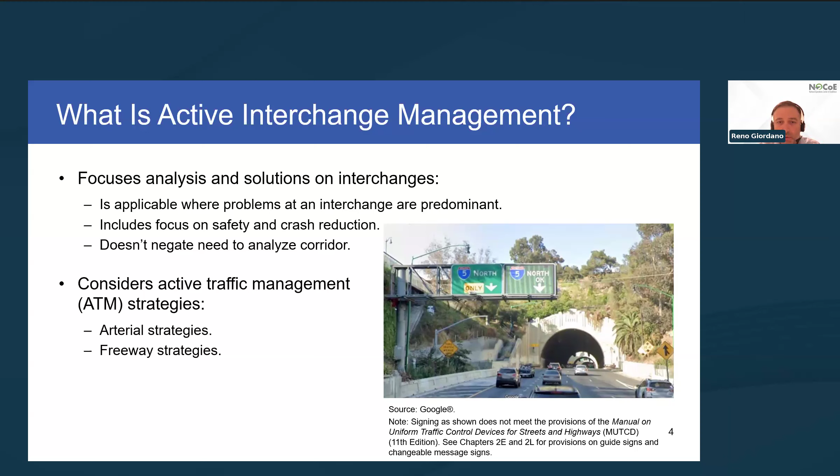And just so you know, the photo on the slide is in Los Angeles. It's illustrating dynamic junction control, which is one of the active traffic management strategies under the AIM umbrella. We'll talk a little bit more about that when we get into the examples.

So why is active interchange management important, or why did we focus on applying active traffic management strategies to interchanges? Historically, safety improvements and congestion reduction at interchanges relied heavily on traditional infrastructure improvements, such as adding lanes, widening or extending ramps, or modifying ramp terminal intersections. But many interchanges, especially those designed and constructed several decades ago, have geometric configurations that make upgrading infrastructure to current standards time consuming and certainly costly.

But AIM offers an operationally focused alternative that's more dynamic, more flexible, and actually more cost effective.

In addition, AIM offers an alternative to more extensive corridor-wide operational solutions by focusing on the primary bottlenecks in most freeway corridors, particularly metropolitan regions. Those are the interchanges themselves.

AIM is important because interchanges are a significant source of safety and congestion problems. These occur due to bottlenecks, queue formation, and vehicles diverging or merging, which result in concentrated lane changing over relatively short distances. Research has shown that free flow capacities at these merge and diverge areas are less than elsewhere along the freeway corridor, so solving interchange problems may improve overall corridor operations.

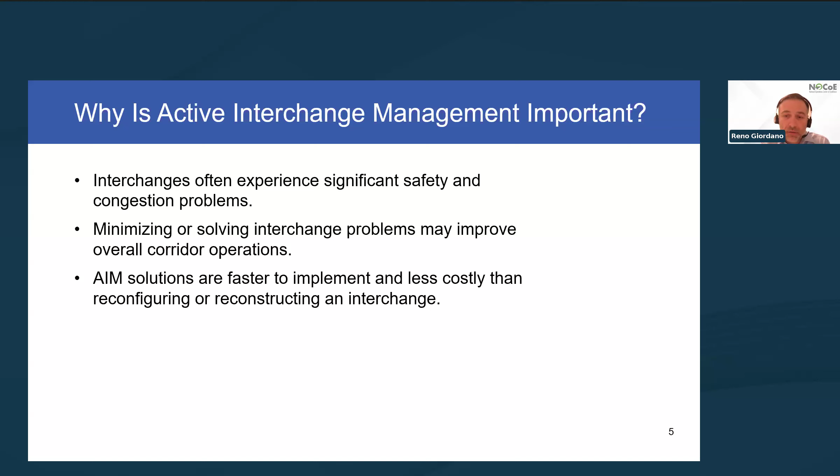As noted, the suite of AIM strategies consists generally of a set of 7 or so active traffic management strategies that can be applied singly or in combination. Right now we'll quickly review each of those summarized here on the screen. The first,

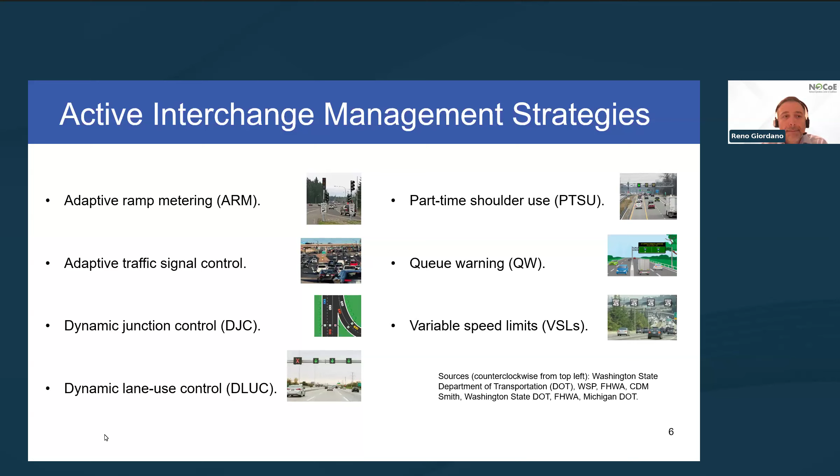adaptive ramp metering. Ramp metering uses traffic signals placed on freeway entrance ramps to regulate how often vehicles can merge onto the freeway. This strategy controls the volume of entering traffic and disperses platoons of vehicles that complicate merging movements. Algorithms dynamically adjust the vehicle rate entry in real time based on congestion levels, and the method is effective for both regular and unexpected traffic congestion.

Of course, adaptive ramp metering is typically more effective when applied at multiple interchanges along the corridor, but when applied in this manner as part of a corridor management strategy, it can complement a more localized AIM approach.

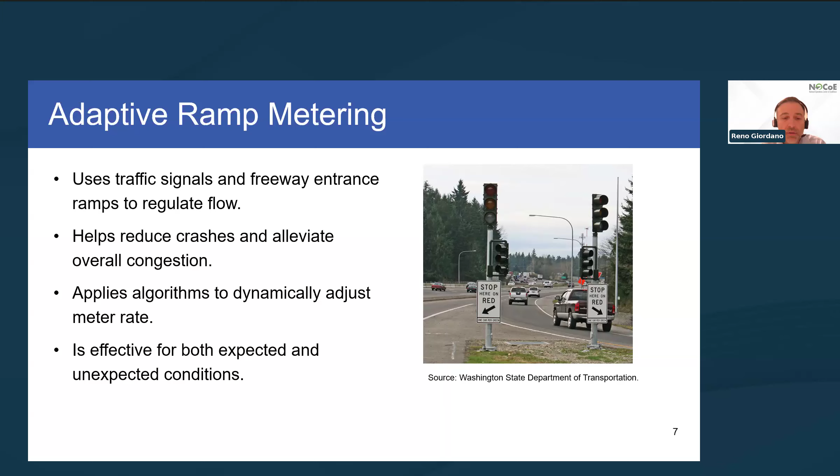Second, adaptive traffic signal control. This involves technologies that collect real-time traffic data to dynamically adjust traffic signal timings and optimize the flow of traffic in a coordinated signal system.

As an AIM strategy, adaptive traffic signal control can be applied at ramp terminals to improve the flow of traffic at those specific locations, managing the potential for backup up the ramp and potentially onto the main line. Adaptive traffic signal control is more typically coordinated with multiple signals along the corridor to be most effective.

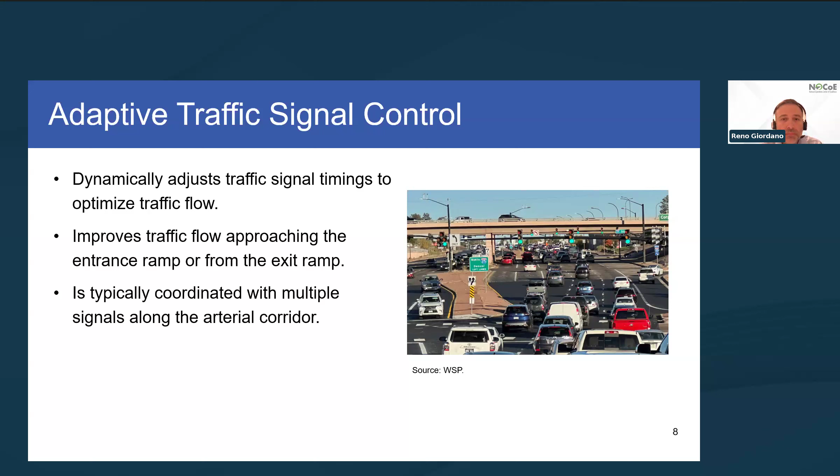Third, dynamic junction control. Dynamic junction control does focus specifically on interchanges, although it doesn't have widespread use, which may be something to consider, maybe overlooked. But dynamic junction control dynamically assigns lane use on main line and ramp lanes at interchange areas where demand fluctuates throughout the day, and often there's an imbalance in that demand between the main line and the ramp.

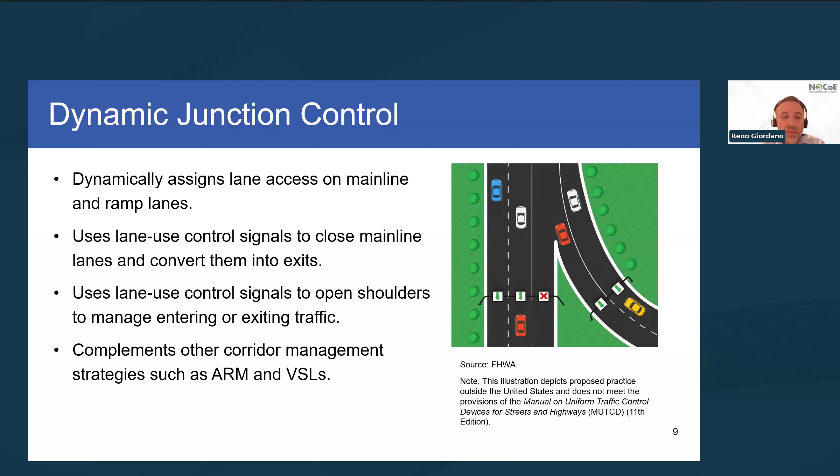We have dynamic lane use control, which involves dynamically closing or opening individual traffic lanes as needed, using overhead lane use control signals. Usually advance warning to drivers is typically given through changeable message signs to encourage safe merging into adjacent lanes.

This strategy is often also used alongside things like variable speed limits and complements other strategies like part-time shoulder use and dynamic junction control.

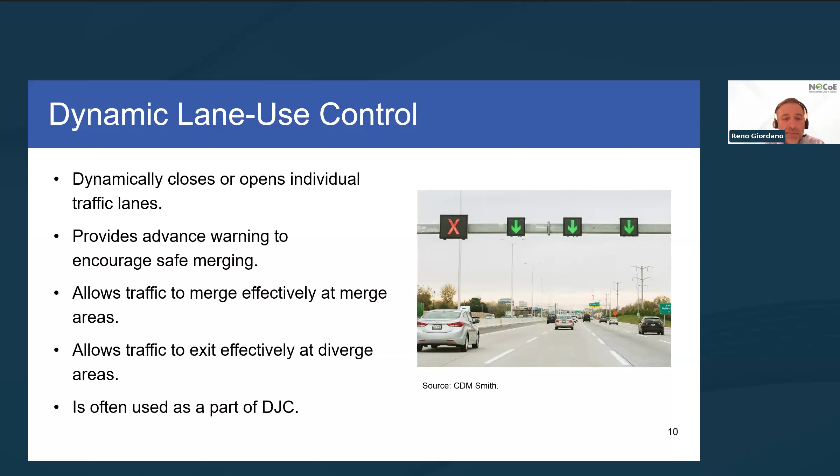Part-time shoulder use itself dynamically enables travel on the shoulder based on congestion levels during peak periods and in response to incidents or other conditions during non-peak periods. This strategy is often implemented in combination with variable speed limits and dynamic lane use control. For interchanges, part-time shoulder use can add lane capacity along ramps or main lines to help merging or exiting movements.

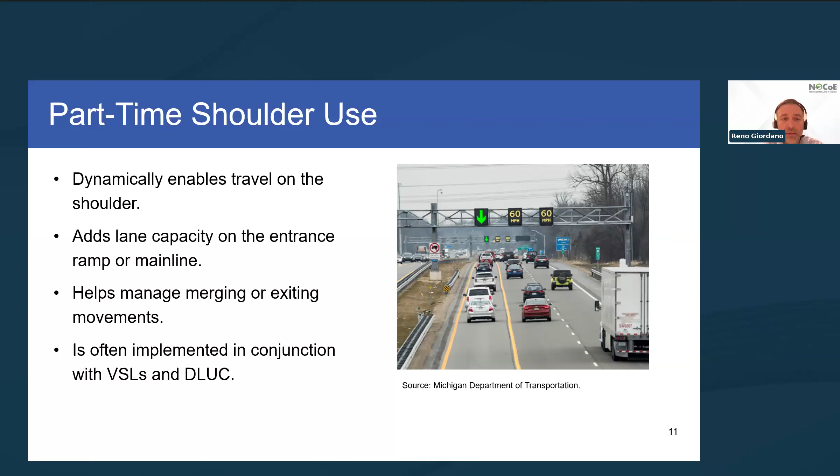Queue warning involves the real-time display of warning messages, usually on changeable message signs, to alert drivers of upcoming congestion and slowdowns. In our case, those would be originating at interchange, merge, or diverge areas. This strategy helps reduce rear-end crashes and enhances safety, and again, can be implemented with others, such as variable speed limits and dynamic lane use control.

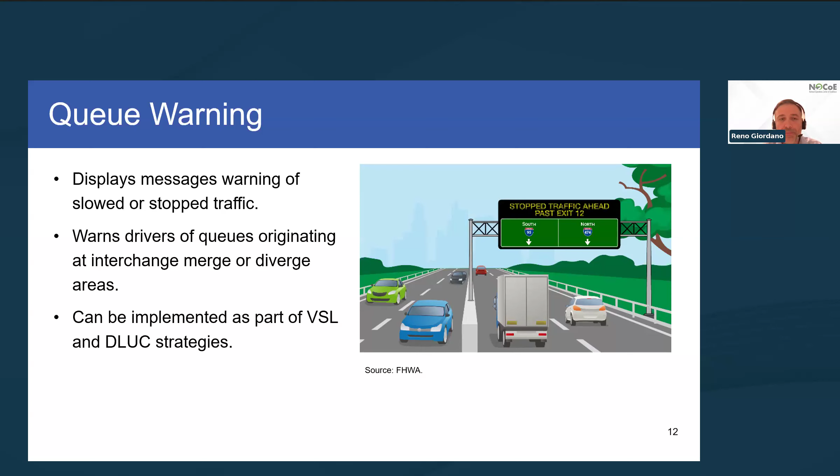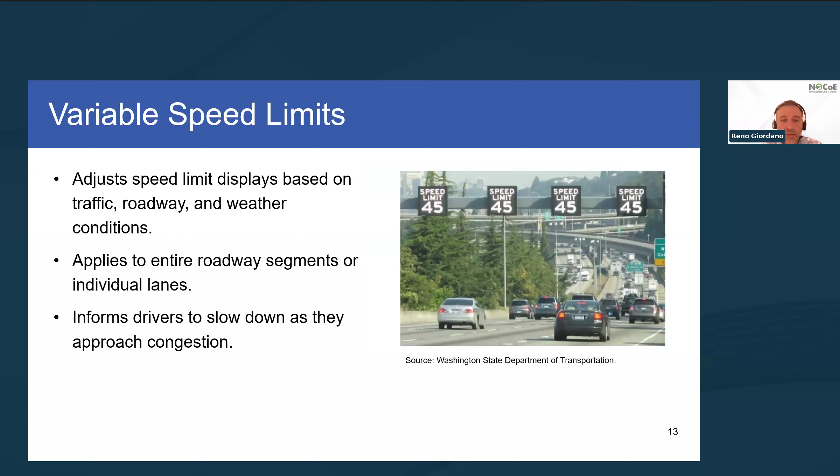And then variable speed limits adjusts speed limit displays in real time based on traffic, roadway, and weather conditions. These speeds can apply to entire roadway segments or individual lanes, and the process helps reduce speed variations between the slowest and fastest vehicles, enhancing safety.

Overall, we refer to those 7 active traffic management strategies in the context of AIM and addressing interchange problems as AIM strategies. So we can summarize them all here in terms of their objectives in the context of addressing these interchange issues.

For adaptive ramp metering, that would be improving traffic flow to allow a better merge. With adaptive traffic signal control, that's improving traffic flow approaching an entrance ramp or moving through the exit ramp. Dynamic junction control, the objective there would be to optimize lane use to improve merge conditions or to optimize lane use to minimize queue spillback.

Dynamic lane use control is to optimize lane use to allow traffic to merge more effectively or to allow mainline traffic to exit more effectively. With the application of part-time shoulder use, that's to add lane capacity on the entrance ramp or main line to help manage merges, to allow traffic to have longer merge distances, or to add additional lane capacity on the main line to help manage exiting movements.

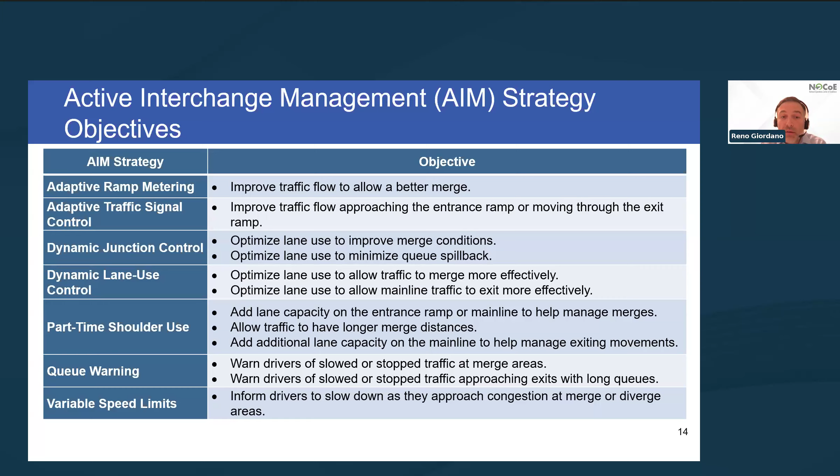With queue warning, it's to warn drivers of slowed or stopped traffic at merge areas or slowed or stopped traffic approaching exits with long queues. And last, with variable speed limits, it's to inform drivers to slow down as they approach congestion at merge or diverge areas. So now a few examples of these in practice.

We have a dynamic junction control example, the queue warning example from Florida that we'll certainly hear more about, and the combination of adaptive ramp metering and part-time shoulder use in Melbourne, Australia. So in LA...

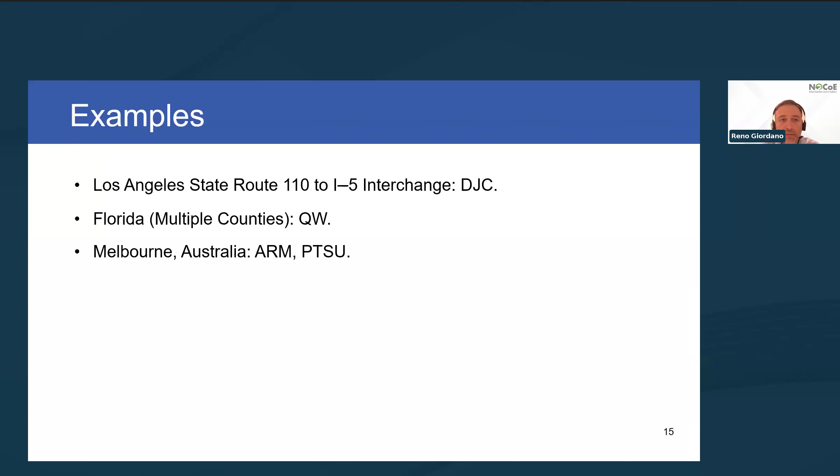The application of dynamic junction control can be found along State Route 110 northbound as you approach a left exit to I-5 northbound. Before the application of dynamic junction control there was significant backup during peak periods from that single lane left exit ramp, which backed up onto 110 through a series of tunnels as well, as you can see in the images on the screen.

So Caltrans decided to open the right shoulder of the exit ramp during peak periods to increase exit capacity, and then permitted the second left lane on 110 approaching the exit to be used as an exit lane to the ramp shoulder. That can be seen in the upper image there, where the I-5 North only sign is displayed upstream on a changeable message sign, indicating that both left lanes can be used to exit to I-5.

During the off-peak, with the ramp shoulder closed, the second left lane reverts to a through lane only for SR 110. As you can see in the lower image, it just says 110 north only. And the results from implementing dynamic junction control here were pretty significant. Average ramp delay declined from more than 20 minutes to less than 5, and crashes were reduced by 30% as well.

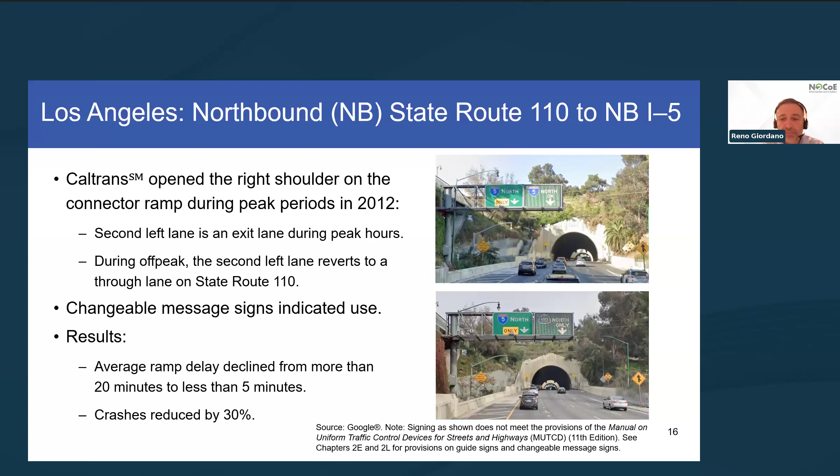Second example we have is the Florida queue warning. I won't spend a lot of time on this one since Eric Gordin will speak about it.

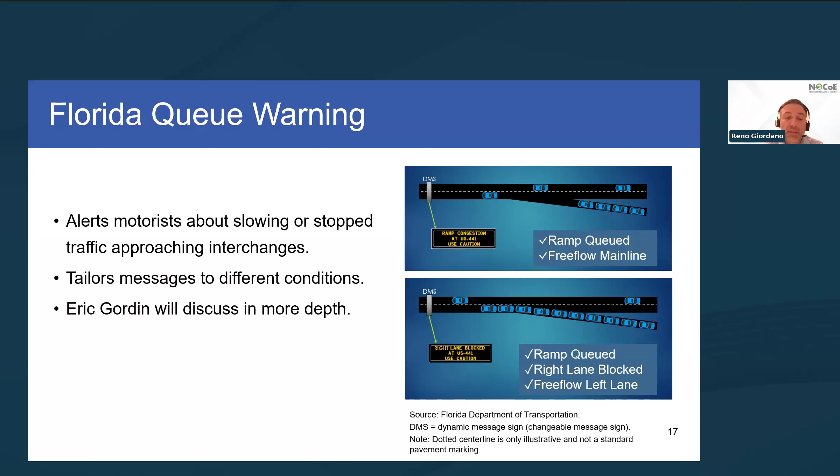In this example, Florida's Turnpike Enterprise is installing queue warning systems along the Turnpike system in several counties to alert motorists to slowing or stop traffic backing up from congested interchanges. Radar devices detect traffic slowdowns or queues near ramps and then automatically trigger messages on changeable message signs to warn the drivers of upcoming traffic conditions. And those messages can be tailored based on congested conditions.

Last example from Melbourne, Australia. This is part-time shoulder use in combination with adaptive ramp metering. In Melbourne, certain entrance ramps have an added lane for metered priority vehicles. Those vehicles are heavy trucks and transit vehicles.

That use of the shoulder on the ramp provides a queue jump while all traffic is in fact metered entering the roadway. So the priority queue jump lane is closed when speeds are higher or volumes are lower, and opened during metering when merge speeds are lower.

This approach is also used where no priority lane exists. The shoulder is used simply for additional queue storage during metering operations. So the photos there show this.

This is the on-ramp from Sunshine Avenue to the M80 Metropolitan Ring Road. The top photo shows where the priority lane starts, and the overhead lane use control signals indicate if the priority lane is open or not. The bottom image shows further downstream at the merge point, where the priority lane merges with the standard entrance ramp lanes, and ramp metering is applied.

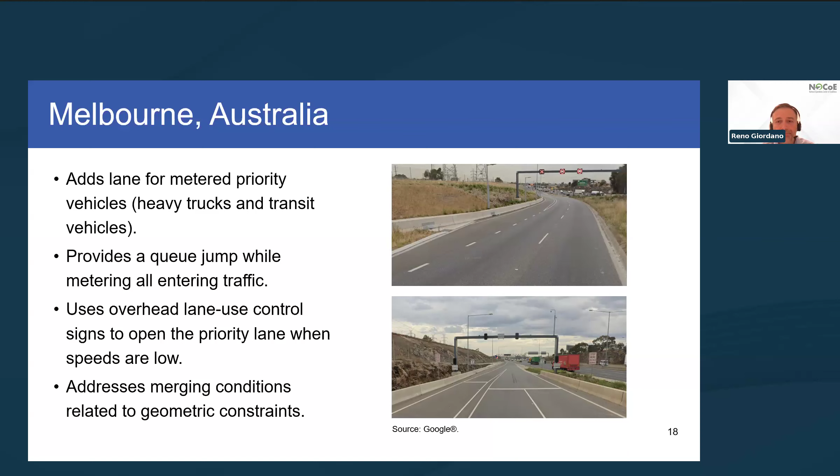Earlier I noted that one reason for focusing on active interchange management was to address often overlooked problems from non-recurring congestion that may occur less frequently but still justify an operational strategy.

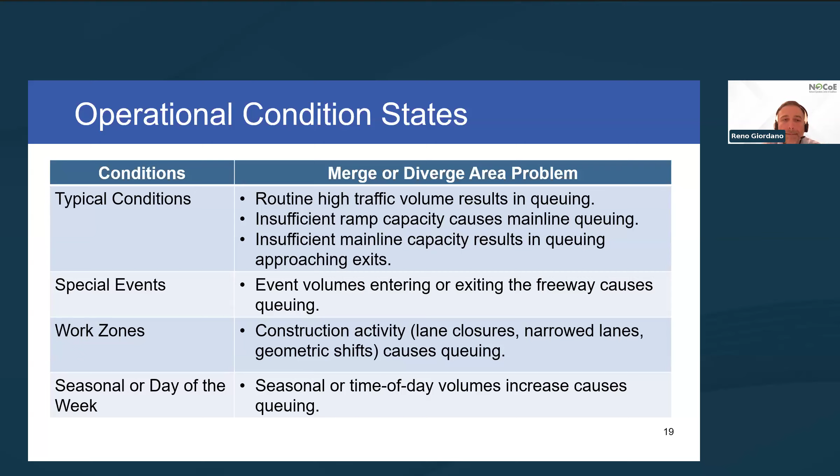To summarize the benefits of AIM, we've been talking about improving safety, and we've seen evidence of reduced crashes, reduced crash severity, and reduction in near crashes. Operationally, we can see a reduction in congestion, evidenced by decreased travel times or increased travel speeds, less delay, more consistent speeds, and improved reliability.

We can also identify improved cost effectiveness compared to traditional infrastructure improvements, shown through improved benefit cost ratios, and of course with an operational solution, increased operational flexibility - the ability to adjust your strategy relative to less flexibility from a fixed infrastructure solution.

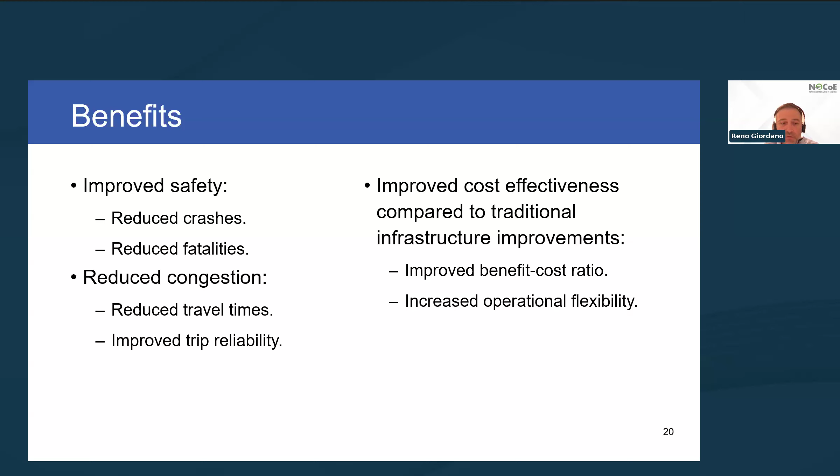Some of those benefits quantified here mention the dynamic junction control example in LA, with substantial delay reduction and crash reductions.

While not necessarily associated with single interchanges, we've got a few examples from active traffic management strategies as well - part-time shoulder use along US 23 north of Ann Arbor in Michigan, called the flex route, which also includes dynamic lane use control and variable speed limits. That's shown a benefit cost ratio of 3, along with notable safety benefits, crash reduction of 17% or even 50% during peak periods. Drivers report high satisfaction with the operation. The flex route on US 23 is currently being expanded further north to I-96 and applied to at least one other corridor in the state.

For variable speed limits, a good example is the I-80 corridor east-west across Wyoming, which has shown significant safety benefits - crash reduction of more than a third, and a strong benefit cost ratio of about 9. And queue warning in the Twin Cities region of Minneapolis along I-94 has shown safety benefits of 56% crash reduction and 69% reduction in near crashes.

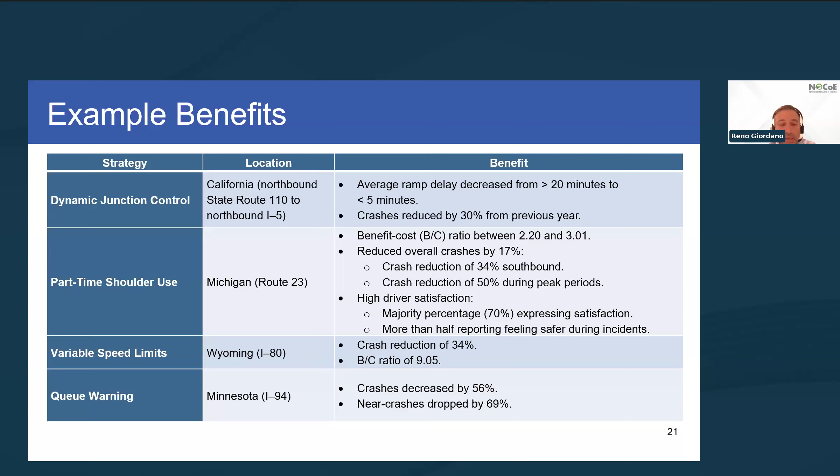Now I'm going to turn it over to Les Jacobson. We'll talk about a methodology to screen problematic interchanges for potential AIM strategies, and then a hypothetical merge example to illustrate it. Les will wrap up with some comments on challenges for applying AIM, and then quickly summarize a couple of products from this project. So go ahead, Les.

Thanks, Reno. So we have a flow chart that I'll get into, but it's a pretty long one, and we can't really see it very well on a single screen. So I'm going to start with a table to give you an idea of what the flowchart does, and then I'll walk through the flowchart as well, because I think it's a little bit easier to follow with a flowchart - at least it is for me.

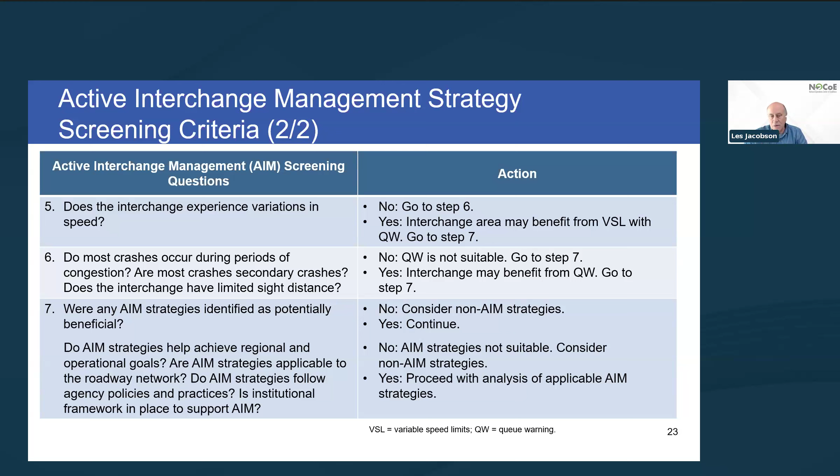Then, finally, look to see if any of these are going to be potentially beneficial. If so, then you should continue, meaning proceed with a more in-depth analysis of the applicable strategies to know which ones to use. So this is kind of a screening to see which ones might be beneficial, and once you have those screened down, go ahead and do a more detailed analysis.

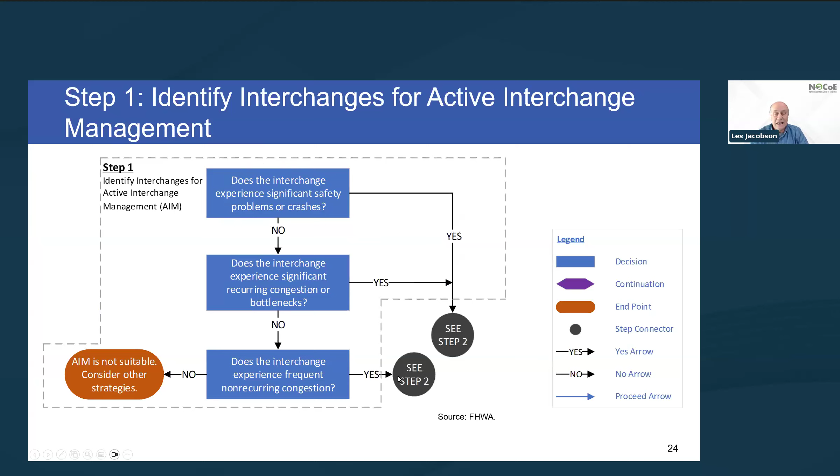So just to show this approach in a flowchart, we start by looking at whether the interchange experiences safety problems or crashes, and if there's recurring congestion. If we see yes to any of that, then we go to the next step, which again is to consider adaptive ramp metering.

So if it's already metered, then we go to step 3. If it's not, that's something you may want to consider adding to your active interchange management strategies.

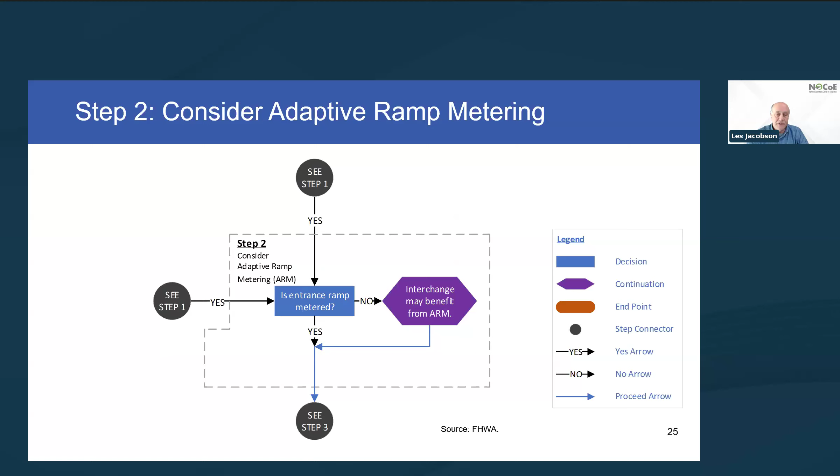Next, as we mentioned, we look for dynamic junction control. We suggest that if there are large variations in mainline and ramp volumes occurring, you may want to consider dynamic junction control.

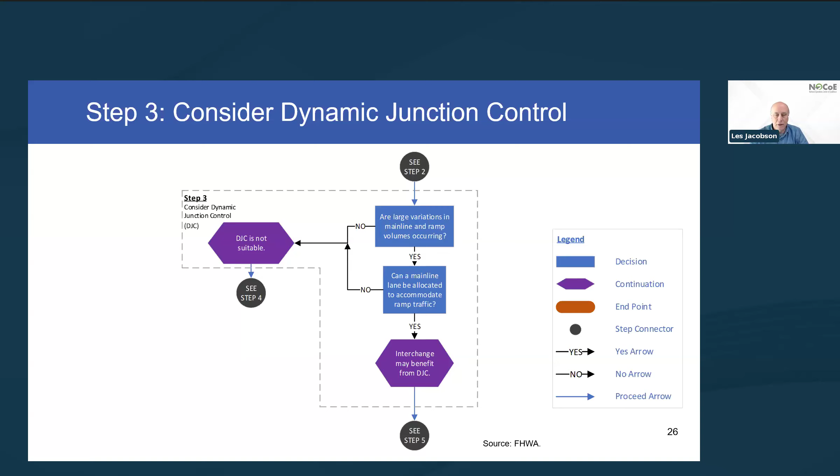What that would do is virtually change the right lane of the mainline with the merge lane from the ramp, encouraging people to move out of the right lane so there's more room for traffic coming onto the ramp. The hypothetical example will demonstrate that a little better if you're not certain what that's all about.

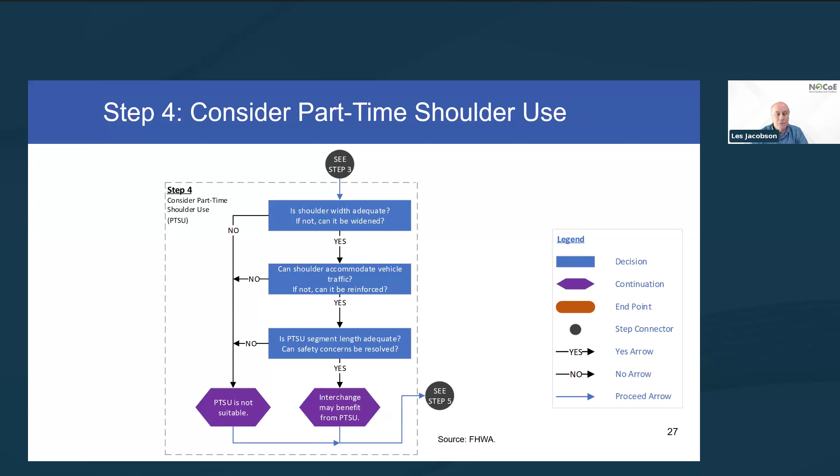After that, look at whether part-time shoulder use is needed. This could be on the ramp or on the mainline, to provide a little more merge length and room to merge into. So again we want to look at the shoulders, and whether you can get a long enough segment to make part-time shoulder use effective.

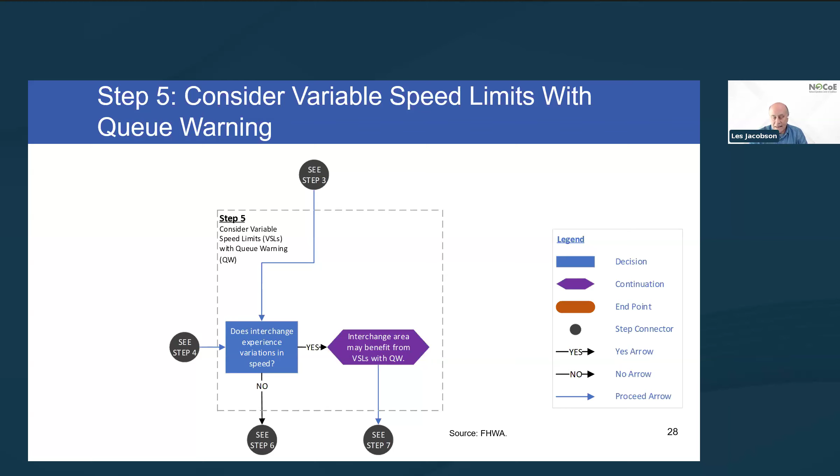Essentially, we move into variable speed limits, checking to see if that applies, just as in any other place, looking at whether there are large variations in speed. You might get people who encounter variations in speed unexpectedly, so variable speed limits can slow them down before they reach that congested location.

And queue warning could go hand in hand with variable speed limits, or could be used without variable speed limits, to warn people of those speed discontinuities before they get there.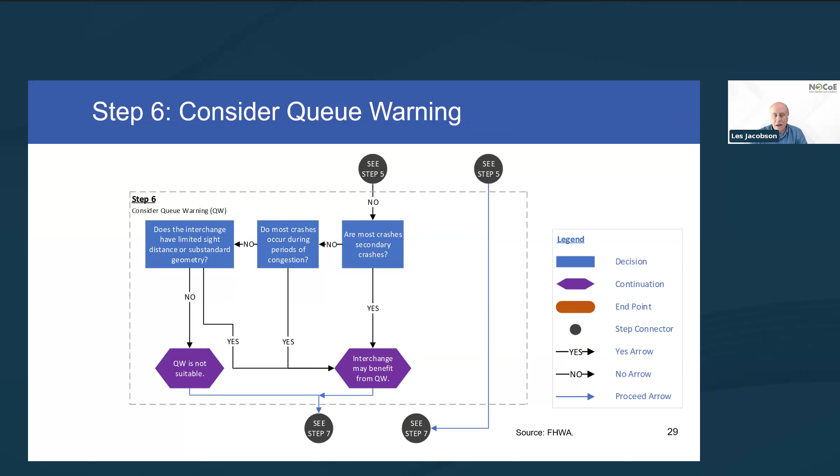Again, look through all of these, and if some strategies have been identified, you really do want to go through and check some other things before you get to the analysis. You want to see if you've got the goals to improve the network, and if your strategies support those goals. Also, if the agencies that are going to be operating it are prepared to operate a real-time active management system. And if those answers are yes, then you go ahead and do the more in-depth analysis.

Moving on with the hypothetical example, here we've got an area, a merge area, and this is not meant to be to scale, so don't be concerned about how sharp this merge seems to be. What happens is there's a high demand entrance ramp from an airport that merges with a multi-lane highway. The peak ramp demand does not coincide with the peak mainline demand, so you get this surge of traffic from the airport not at the same time that the recurring congestion on the main line occurs.

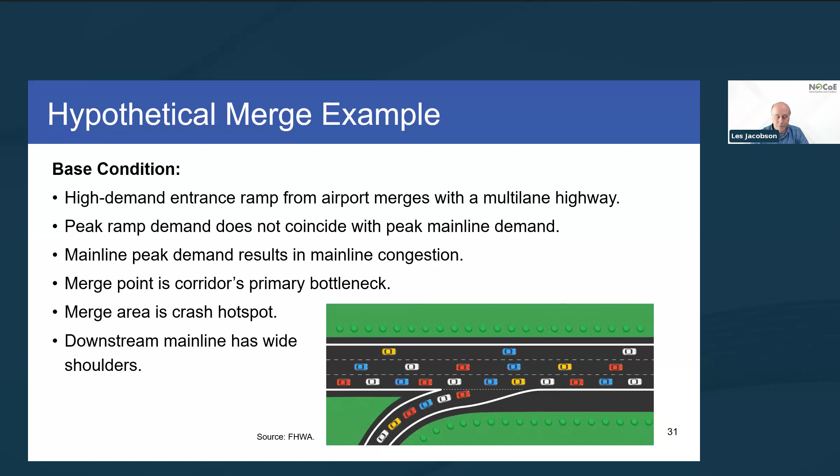So to look at the screening process, in step one, we see that there's some crashes and congestion, and it's a candidate for active interchange management strategies.

It may be that ramp metering would be effective. It doesn't have ramp metering today, and there's no other metering in the corridor. So ramp metering may or may not be appropriate there. Usually you want to have several ramps in a row in order to have ramp metering be effective.

There are large variations in traffic volumes, and there are times that the main line during the peak volumes can't give up a lane to allow that merge traffic to come in.

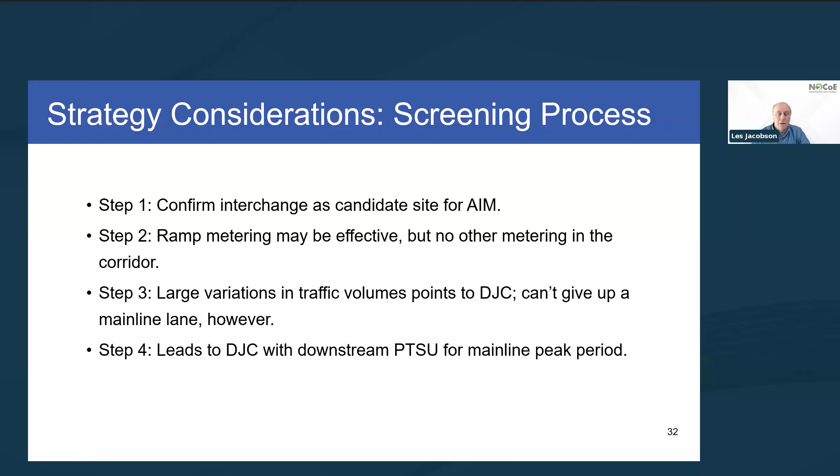So it leads us to looking at dynamic junction control with downstream part-time shoulder use for the mainline peak period. Off-peak, we could do junction control, and then during the peak, we would use mainline part-time shoulder use. So that would look something like this.

This is the peak option where the shoulder lane is in place. The shoulder lane would be in operation and have a changeable message sign that would show that it was open. This changeable message sign here, I want to point out, but it's blank, so that this traffic coming on from the ramp would have a hard time merging into the main line. So it's much more effective to be able to give them a lane that might go as far as the next interchange for them to merge into the main line.

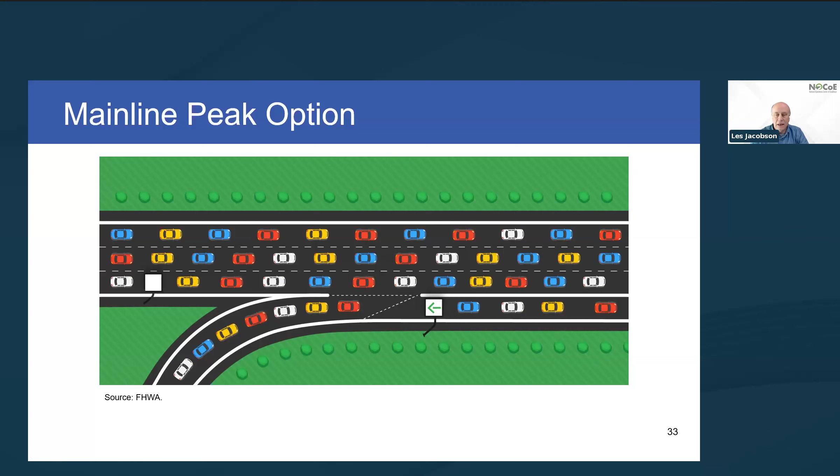So when the airport ramp has its peak, there's much less traffic in the main line, and that's when dynamic junction control might be more effective. You don't lose the refuge area of the shoulder, and the CMS back here would alert drivers that there's a heavy merge from the right ahead and encourage them to merge out of that lane to give more room for merging traffic from the ramp.

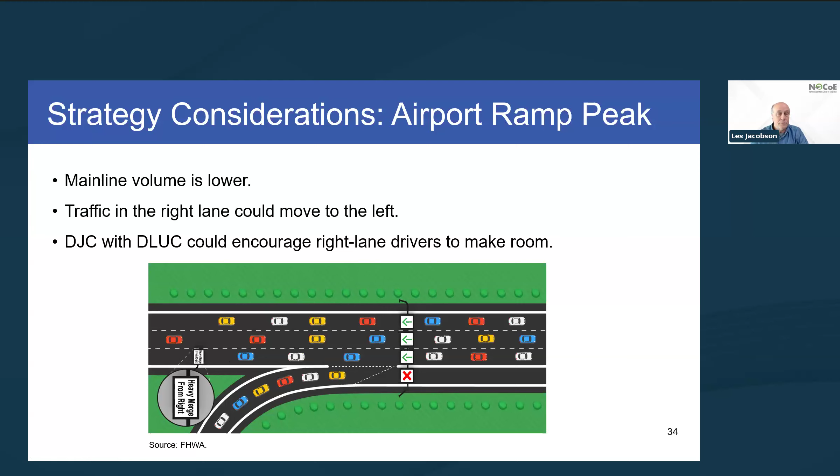One of the things you'd want to consider is that there's a lot of fluctuations in ramp demand seasonally, caused by flight delays. So having some things that are very flexible in terms of operation would be important. Also, because there could be this unexpected queuing, including variable speed limits and queue warning is probably worth considering.

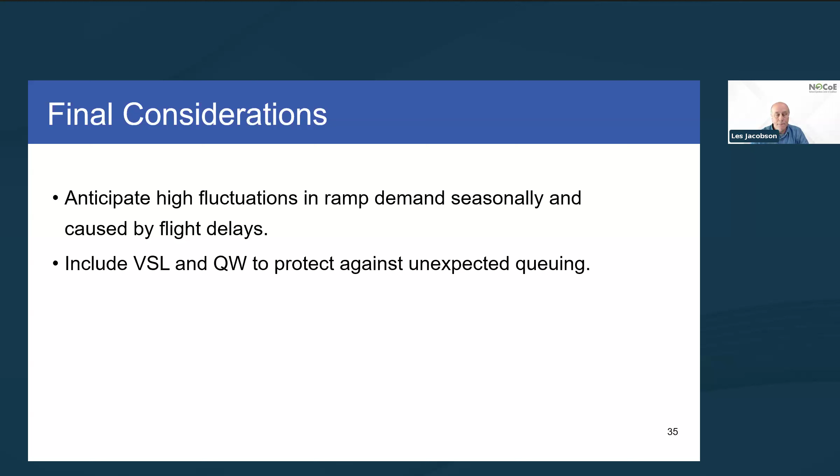So some of the challenges with any of these active interchange management strategies, some are institutional and educational. Are you and your partner agencies ready for something like this? Is the public going to understand it? What kind of education needs to be provided for both agency staff, but also the driving public?

Also, do you have the funding to be able to do whatever your strategies are? Do you have the staffing that's necessary? Do you have a history of traffic management? Do you have the facilities to manage this effectively?

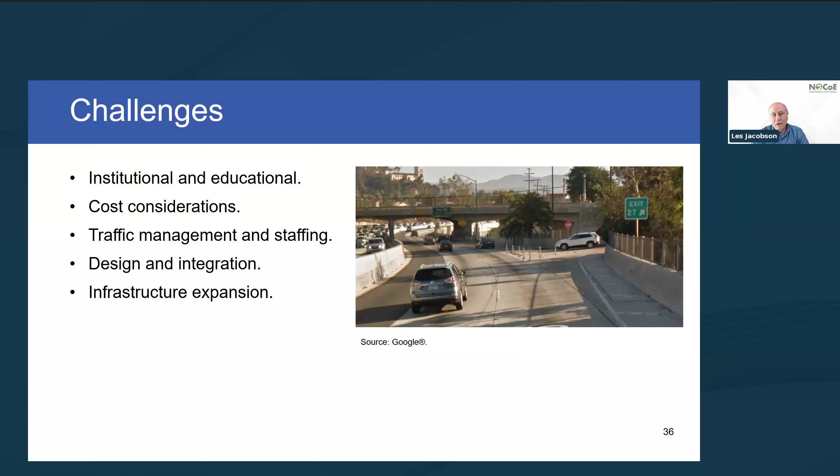You also want to think about design and integrating this into your overall transportation management process and scheme. And finally, is infrastructure expansion going to be occurring in the future? Are there some other things in the corridor that might have to occur? Just take that into account in your overall strategies and plans.

So this project overall, we've got a few things coming out. There's a primer that will explain all of this in a lot more depth. There'll also be a shorter informational brief. And then we're planning on anywhere from 3 to 6 locations to have workshops that would actually apply this process to particular interchanges for an agency.

That'll be coming up. So with that, we'll hold questions to the end, and we can move on to Eric to talk about their queue warning system with the Florida Turnpike Enterprise.

Yeah, thank you, Les. Sorry, I had to find the unmute button. We really appreciate this opportunity, Kelly and I, to join the NOCoE team. Thank you so much for the invitation. We're going to talk about the queue warning system, of course.

Today I'll be co-presenting with Kelly Kenny. Kelly's our TMC program manager, leading our queue warning software effort and all the operations as it moves forward. So she's a key and vital person leading the charge on queue warning. What I wanted to do was start off with a brief overview of Florida's Turnpike, super brief. We consider ourselves to be a vital part of the infrastructure here in Florida.

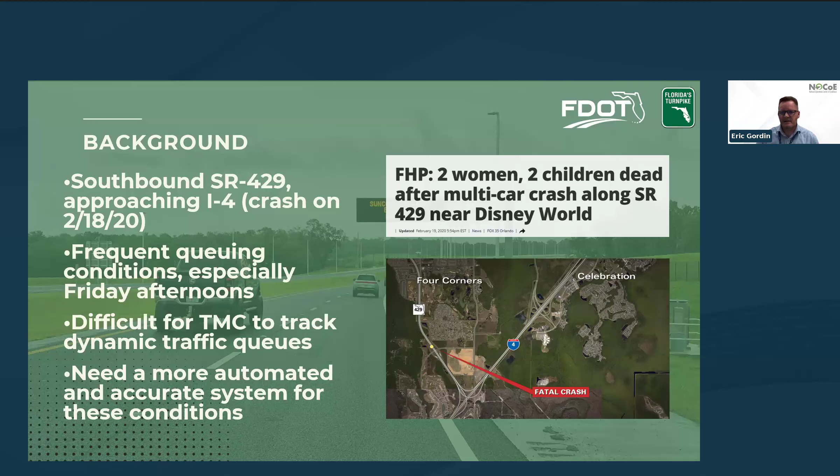I know there's a lot of information on these initial slides, so I'll go fairly quick through these. The main takeaway is, if you recall, the fatal crash happened in February 2020. In this case, what we did was we split up our system into a northern queue warning and a southern queue warning system. State Road 91 is another term for Florida's Turnpike, and that's the main road between Orlando, north of Orlando, and the Miami, South Florida area. Along with these, we included 528 and 429, both in Central Florida, and then 589, which is actually in the Tampa area.

During this initial screening, we worked with our consultant and said, where are we having the most challenges? What are the high priority locations on our system? For the northern system, the Central Florida and West Coast, we identified approximately 7 locations, including southbound 429 to I-4, the example from the fatal crash. Part of what we also included in the post-design services was the initial development of a queue warning software.

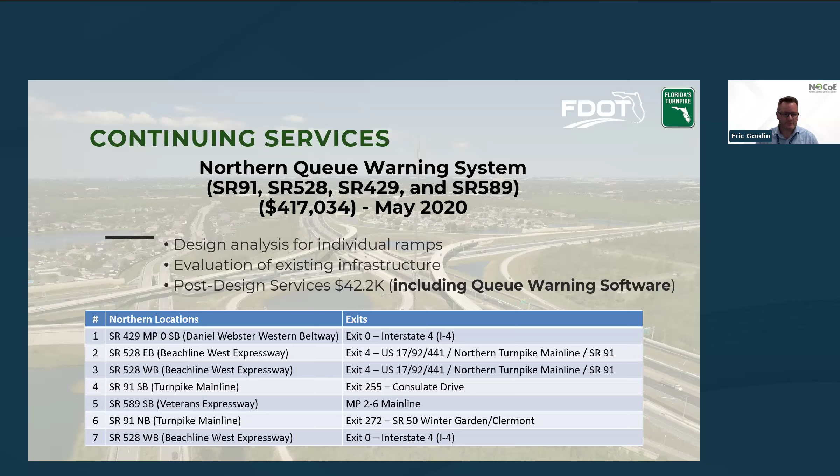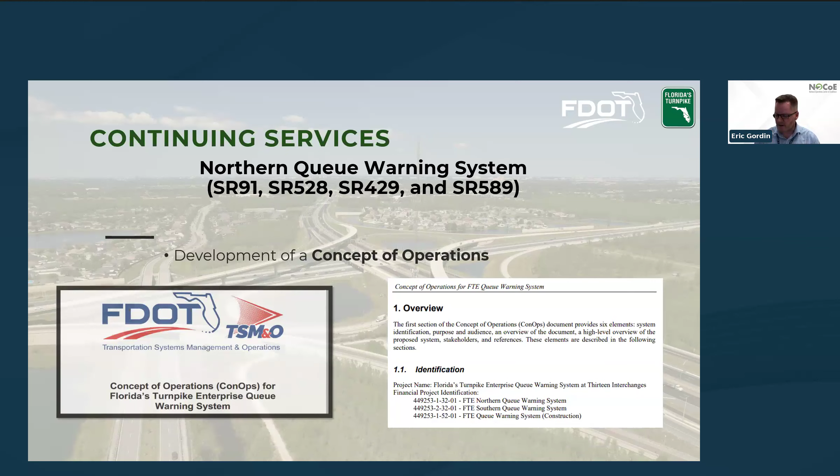One of the things I wanted to point out, since this was a very new approach and new system for us, we wanted to include a very good and detailed concept of operation. That was included as part of the initial queue warning systems starting in May 2020.

Here's a list on the southern queue warning systems. It also had some software components to it. These are some other locations located in our southern region off of the Sawgrass Expressway, the main line, and then the extension that takes customers and travelers all the way to US 1 if you're headed to the Keys.

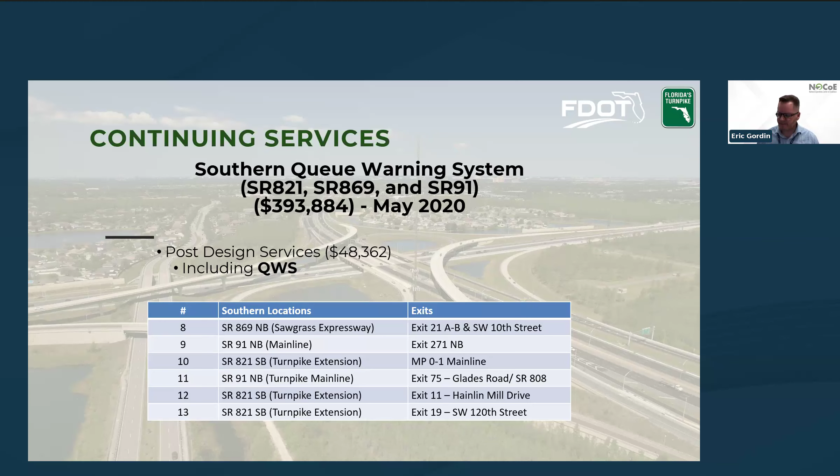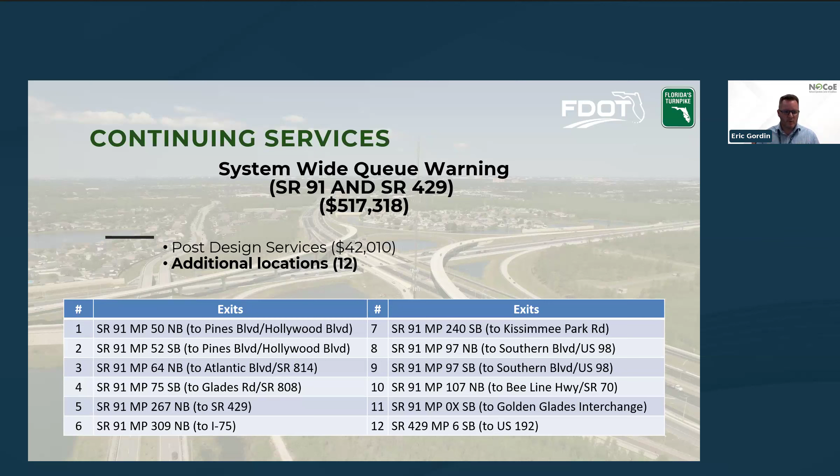After that point, once we did the initial northern and southern, we started looking at, on a system-wide basis, what are some other locations where we could apply this? During that process, we actually added 12 new locations to that list based on our knowledge of where we were experiencing the most queues approaching these particular exits. So initially we started off by looking at what interchanges were causing the most severe congestion for us, and what we could do about them in terms of queue warning.

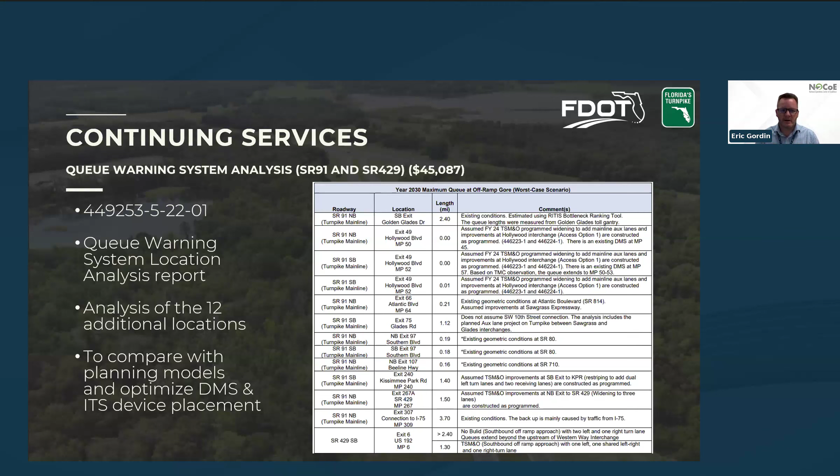On this slide, I wanted to point out that we talked with our team and felt the need to perform a very accurate analysis of where we were going to need to put, let's say, a new dynamic message sign, and where's the optimal or best location for that sign. Because every interchange experienced a different level of traffic queuing, what we did in this level of effort is conduct an analysis report, analyzing 12 different locations, and worked with our team to try and approximate where the maximum queue might be. That then enabled us to place the DMS, if it needed a new one, in the best and optimal location where we could.

Going back to some of the locations we identified in the northern and southern queue warning systems initially, and then we added the 12 new locations, we determined that not every location needed new infrastructure. It might have needed a new detector to help us, or it might have needed a new camera so we could have better visibility.

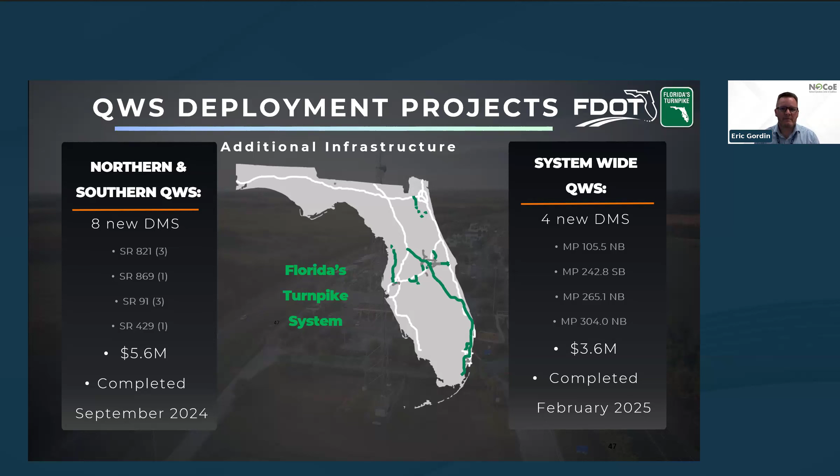So next, I wanted to transition it over to Kelly, and she's going to talk a little bit about the benefits and go into more detail about the queue warning system itself. Thank you. Thanks, Eric.

So as Eric mentioned, I'm going to start with the benefits, and we saw 4 main benefits when we first rolled this out. We immediately noticed, as we were able to message dynamically for end of queue conditions specific to certain interchanges, but also routine congestion locations, a substantial reduction in rear end crashes, which often had very significant injury or fatality, as Eric shared the story of that crash near Disney in 2020. This promotes confidence in our motorist information.

So you have 4 or 5 TMC operators trying to manage 15 or 20 recurring congestion and off-ramp backup locations during AM peak and PM peak periods. Not only are they trying to manage this, they're trying to manage where the end of the queue is and update that dynamically on the signs so people have accurate information as they pass under them. This ability to automate is allowing us to have accurate real-time information on the signs and promoting motorist confidence.

Of course, this increases efficiency in our TMC operations. If they're not having to chase the queue and consistently update the DMS signs during peak periods, they can focus on real-time management of events and dispatching our road rangers and specialty towing programs, getting incidents cleared quicker. We were also able to provide this as a benefit to all Florida Department of Transportation districts, sharing the software after its development so that 2 or 3 other districts are actively using it, with others interested going forward.

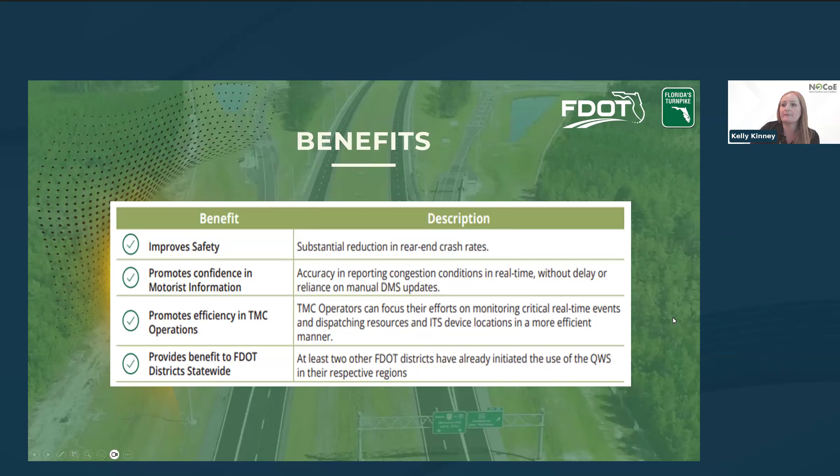So there's really no interface directly with the TMC operator. Their responsibility is to create a congestion or off-ramp backup event and send that information to third-party nav systems and to the statewide 511 system, but they're not responsible for activating or updating the DMS signs at that point - the software does all that automatically.

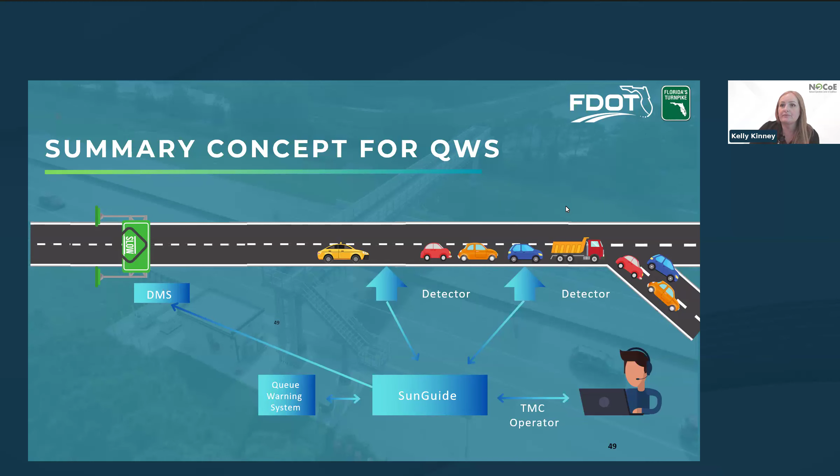Okay, so what are the trigger conditions that we have set up for our particular roadway system? Like Eric mentioned, we have a pretty large system, over 500 miles of roadway, spanning multiple urban areas. So there's a lot of different conditions that we saw merited a trigger.

The first one was exit delays. Eric mentioned that some existing infrastructure could be used, some new infrastructure was needed. So specifically for exit delays, you had to have an MVDS placement that was fairly close to the exit or GORE area, or in a location that would be able to be triggered where you would expect the queuing to occur onto the main line. So if you happen to get a gap in your location, maybe a mile downstream or a mile upstream, it really couldn't serve the purpose well of automating the messaging for the exit delay trigger.

But the way this trigger worked is it's looking lane specific. So it can be set up to only look at a left lane or a right lane, whatever the need is, for that threshold condition, while the other lanes are not meeting the threshold condition. It's almost like two triggers in one. The exit lane has to meet the trigger for low speed, high occupancy, and the other lanes are the inverse of that. So if the ramp is queued and the main line is free flow, it triggers that specific message on the DMS telling people there's exit delays and for through traffic to keep left.

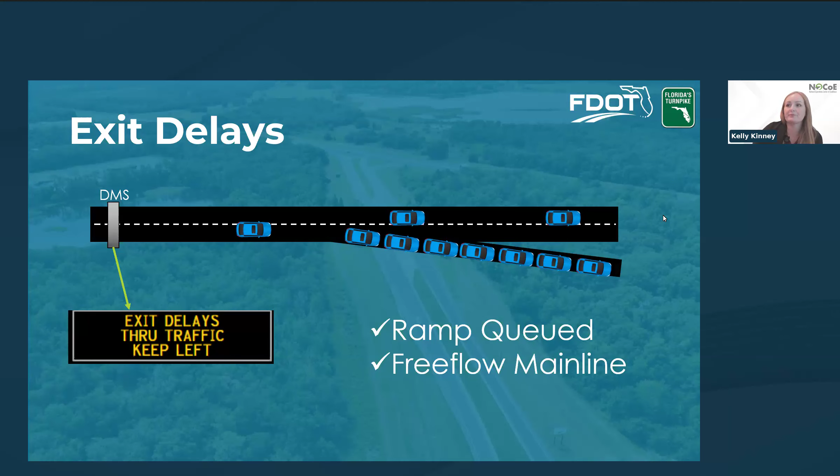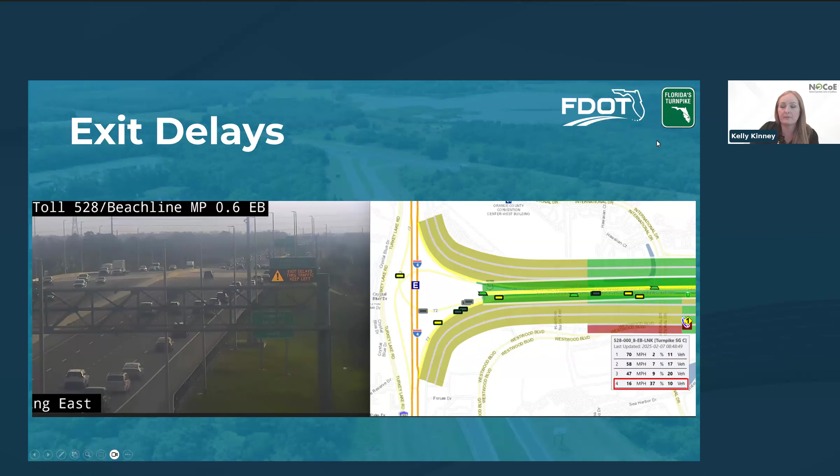But let's say the DMS happens to be in an area where it's within congestion—let's say your interchange has backed up all of the travel lanes and you have a DMS in close proximity. The software is designed to then look at a trigger telling it to look downstream at the first available MVDS that doesn't encounter congestion, and calculate from the DMS to where that congestion condition ends, what's the distance.

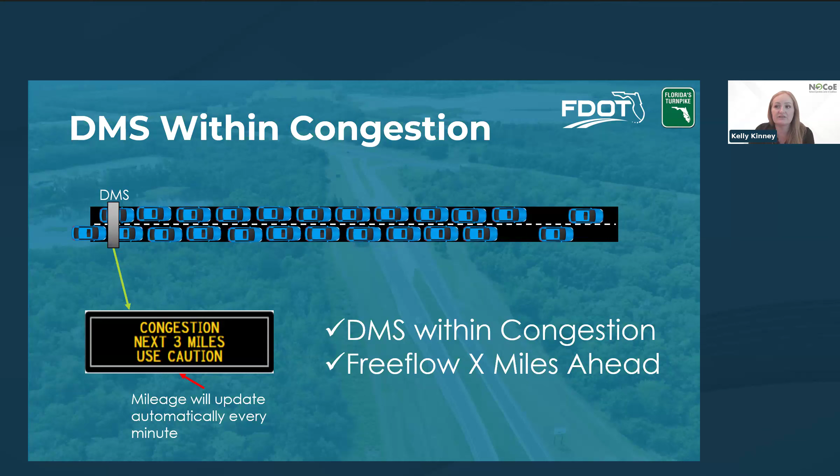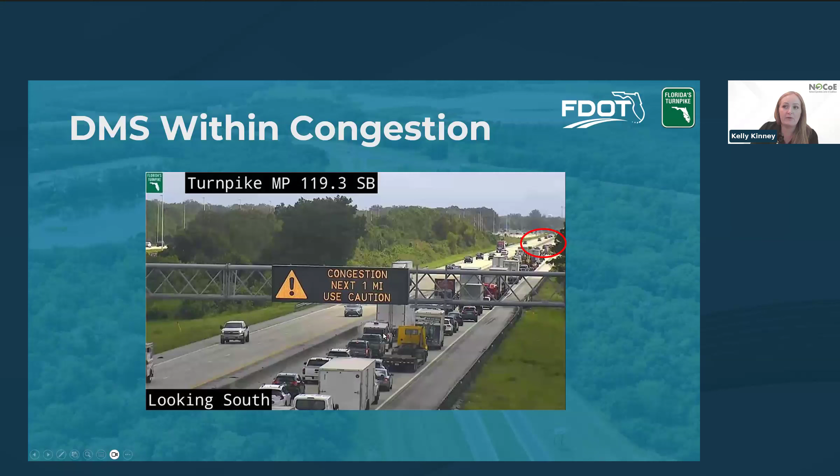The third trigger, as you probably guessed, is if the DMS is not within the congestion and it's not specific to an exit ramp—it's looking at downstream congestion that's not actually underneath the DMS sign, some distance ahead or downstream. So if it's free flow at the DMS, it's going to look at every downstream detector within a 10-mile radius, and determine if the conditions are met for low speed, high occupancy, then calculate the distance from that DMS to where the first detector that encounters the congestion is.

And again, this will update every 1 minute. So if you're looking at a peak period congestion where it's growing, the operator doesn't have to worry about updating that end of queue condition—the sign will automatically update.

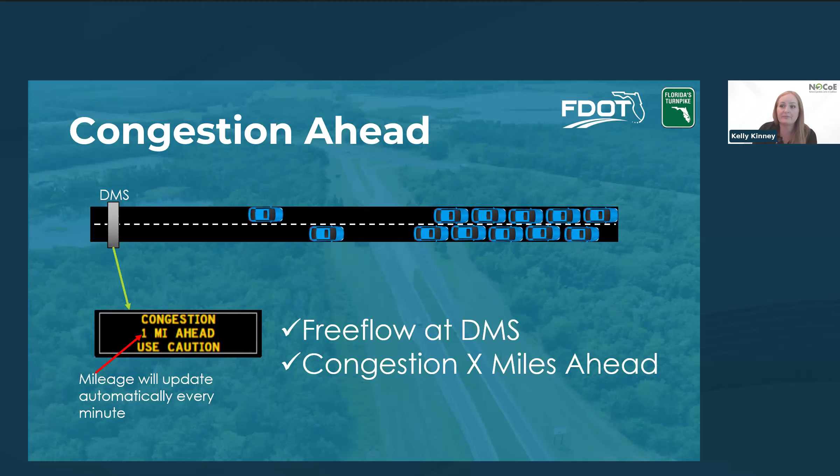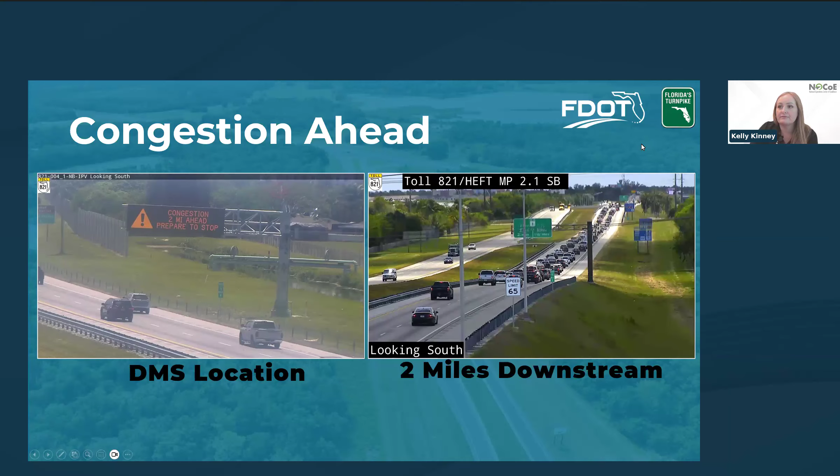As I briefly mentioned, in the SunGuide software, if you have an ongoing incident, let's say there's a crash or emergency vehicles, the incident message automatically merges with the queue warning message. So you're letting people know that critical piece of information, like the lane blockage associated with an event, but you're also merging that with the critical piece of information of when they can anticipate they're going to come to a stopped or slowed condition.

This is automated. It's a setting within the software, so the district who uses the software can choose to use it or not, or leave it up to manual intervention from the operator to merge when they feel appropriate. But we do automate this at the turnpike so that all incident messaging will be auto-merged if there's an available queue warning message.

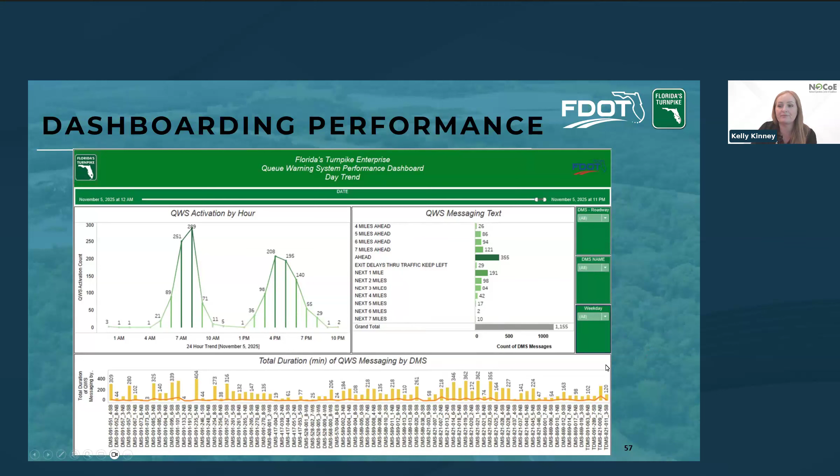Then we started looking at some before and after analysis. I pulled this one example because it goes back to the very beginning story we saw about how this queue warning project kicked off, from that very tragic accident we had on 429.

As part of the project, we installed a new DMS at mile marker 3 on the 429 southbound to try and mitigate the crashes we saw from the I-4 exit delays. Before we had queue warning, for about the 18 months prior, we saw the crash rate versus post queue warning, where we saw a crash reduction of about 78%.

As Eric mentioned, there were also improvements over the last probably 6 to 9 months on I-4 to increase some capacity in that area, so the delays are not as substantial as they once were. But we found that even before the additional lane had opened on I-4, we saw a significant reduction in rear end crashes and a reduction in the severity of crashes. That was across the board at several locations we evaluated in the Orlando metro area.

It was really location specific. There were some locations we evaluated where we didn't see a reduction in crashes, perhaps due to other mitigating circumstances or some visual sightline barriers to where the end of the queue is. So maybe there are some additional needs there, but it's been highly successful in several locations we've evaluated.

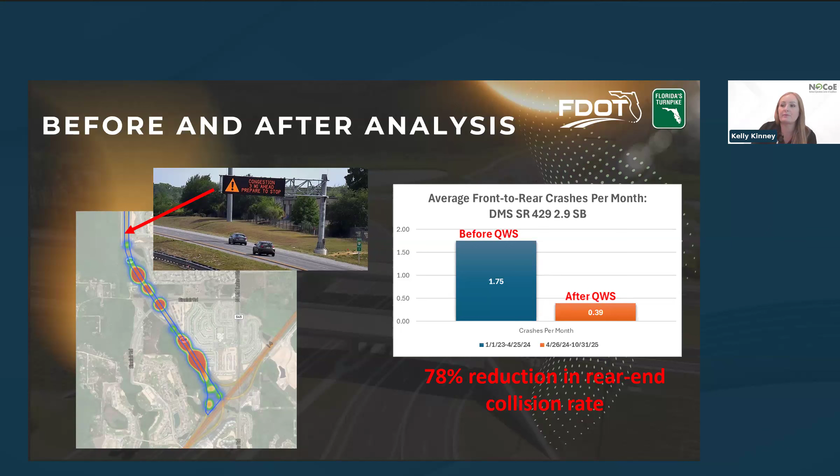So some of our current efforts—one limitation we found is that right now we only have one data source feeding this system, this software, and that's our VDS data. So we're looking at additional data sources to kind of fill in some gaps.

If you have a widening project or a major infrastructure improvement where VDSs are sometimes temporarily removed, or you have an outage where there's a gap in VDS coverage, you're left without a lot of good information to push to the queue warning system. So we have a current project right now to implement probe data into the queue warning software.

That way it can be used in place of or in addition to the VDS data to fill in those gaps. Some future efforts involve potentially using smart work zone devices. These are construction projects, usually within our widening projects, where they put out equipment on the side of the road as part of construction to monitor their specific construction zone—being able to integrate that data back into queue warning.

And then we're starting a pilot with AI camera detection. It's called Activision, into our SunGuide software. If speeds and occupancy can be detected via the camera, the critical part is that it can be lane specific. So you can look at things like just an exit lane versus the through lanes, and make the differentiation between exit delays versus congestion on the sign.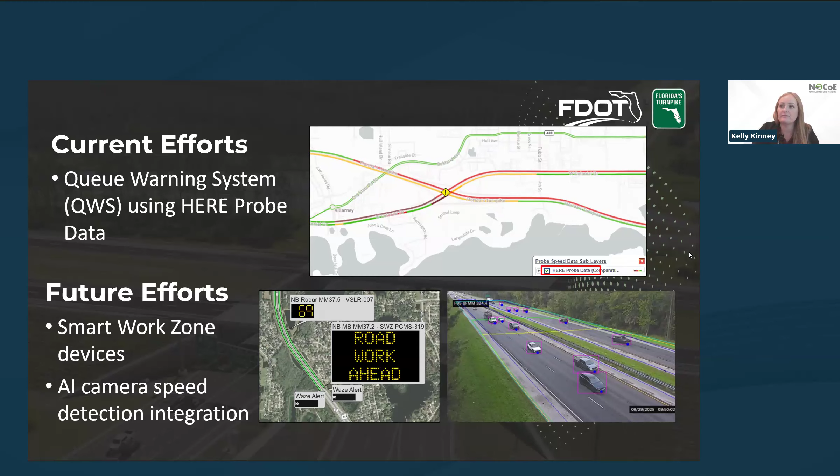I think that's it for us. Eric, did you have anything to add? No, thank you, Kelly. Just explaining that we've expanded it beyond those initial interchanges to be more applicable system wide. And we did get one question in the chat, but I'll see if our facilitators would like to handle questions. But thank you, Kelly.